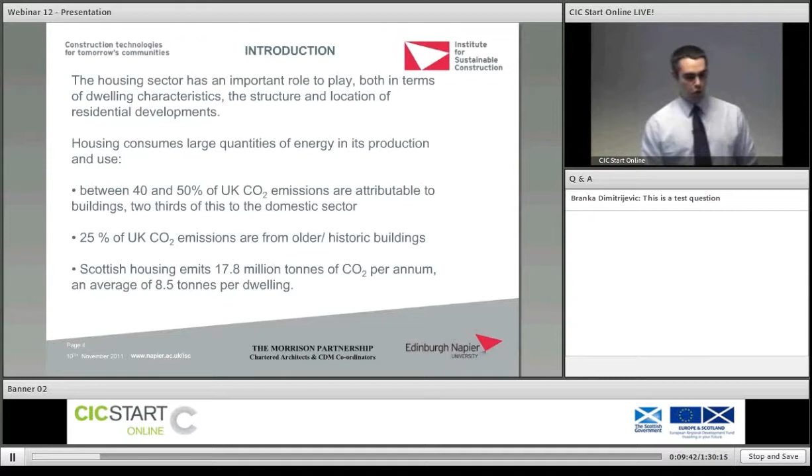The Scottish housing stock emits up to just below 18 million tonnes of CO2 per annum, and that comes about to 8.5 tonnes per dwelling. So there are a lot of issues on buildings contributing a great deal to carbon and the amount that's emitted.

For this reason, dwellings, existing and current stock buildings, historic buildings, have to be dealt with and refurbished. And it's not only because of its heritage or historic significance, but also because of its social significance in terms of communities and the location and value it presents to society. But it's also important to save energy.

Thermal comfort is important for the residents of these buildings. So it's something that has to be also addressed and is important.

The consultancy provided was an academic consultancy between Edinburgh Napier University and the Morrison Partnership. And there were a lot of issues with the building that we had to address.

The main objectives of the study were to reduce energy, to increase thermal comfort within the property, and also to create ways of using renewable energy or more sustainable energy production into historic buildings, in this case study.

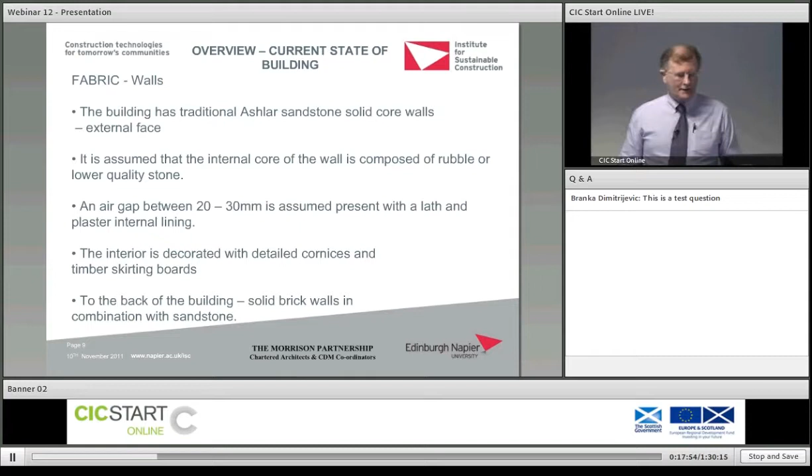I'm going to take you now through the different elements of the fabric. And first of all, we'll look at the walls. The main part of the building is simply a sandstone construction, as you would expect from the early 1800s. It's got a typical cross-section with infill rubble and a lath and plaster internal lining.

There are quite a few decorative cornices in the building, a number of very fine skirting boards and other window features. The existing timber shutters are all still in place. So there's quite a lot of features inside the building that we have to respect and retain.

However, the building at the back, which saw most of the extensions and alterations over the decades, was in fact built with brick and provides, unfortunately, a fairly cold area to that part of the house. That is perhaps one of the main reasons that the client was looking to have alterations, refurbishment and extension work carried out.

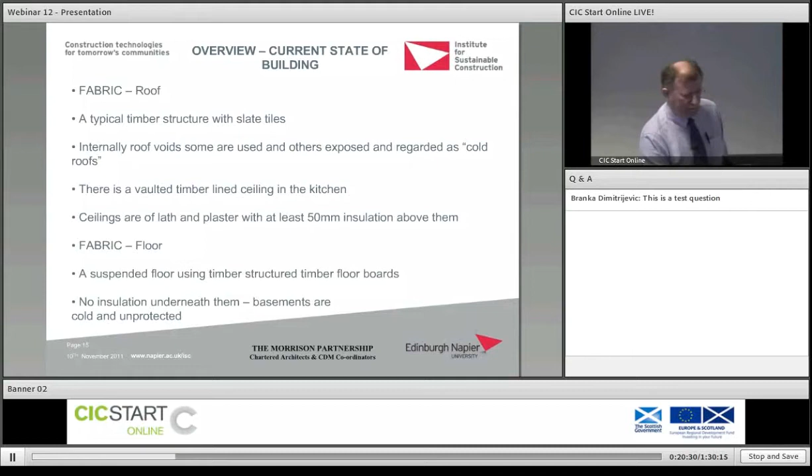The roof itself is fairly straightforward. It is just simply a timber construction with slates. There are some flat roofs in the new extension pieces to the rear of the building, but by and large, most of it is covered in slate.

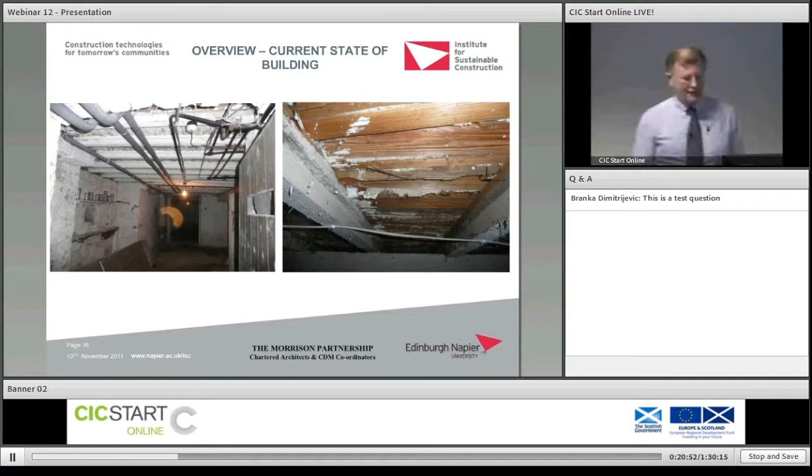The floor is a timber suspended floor with obviously finished floorboards for the look of the property. There is a small element of concrete floor along at the far end of the building where the hospital areas were. That is, of course, maybe to be expected. There is no insulation in the floor, but there is a modicum of insulation in the roof space.

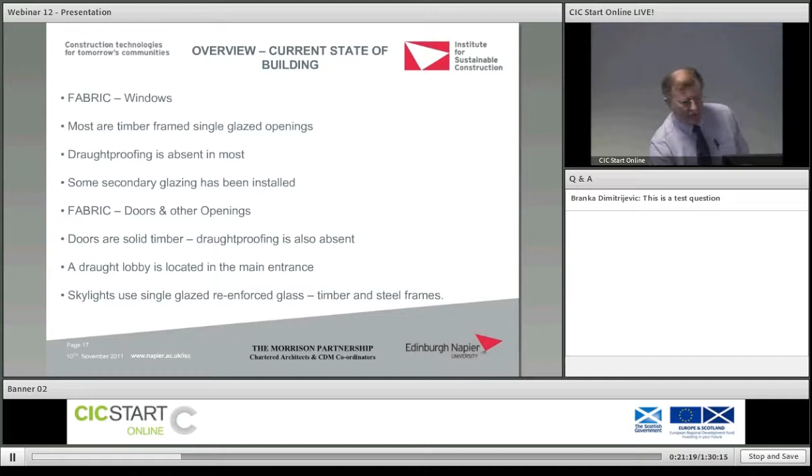Here you see typically the floors exposed. Fortunately, we are able to get pretty good access through the underbuilding to most of the ground floor areas, and that will provide us the opportunity to do some upgrading in that area.

The windows, most of them are single glazed. They're quite drafty. I think there needs to be quite a bit of draft proofing done to reduce the amount of unintended ventilation in the building. Similarly, the doors as well are quite ill-fitting.

The roof lights and skylights again provide quite a problem in terms of the amount of energy that's escaping from this building.

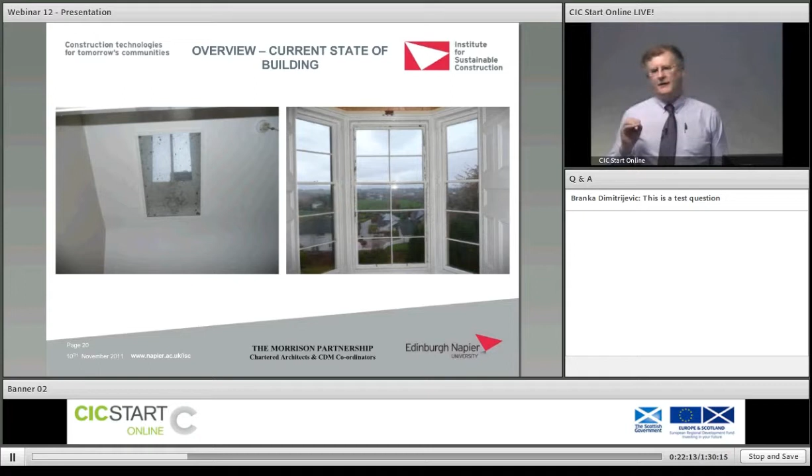Here you see a typical view of the single glazed window with shutters still operational, and we would recommend making sure that the shutters can come back into use as part of energy saving measures.

And these are some of the views from the upper floor, looking out towards the south from the master bedroom.

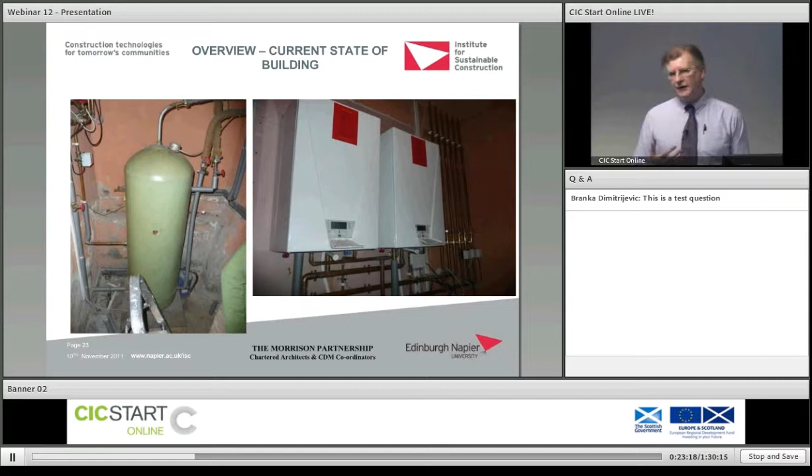The current heating system consists of two gas combi boilers, which have been fairly unreliable of late. One of the aspects they're looking at was in fact to renew the heating system, and we took that into account in our proposals. In fact, one of the boilers has been giving some trouble recently.

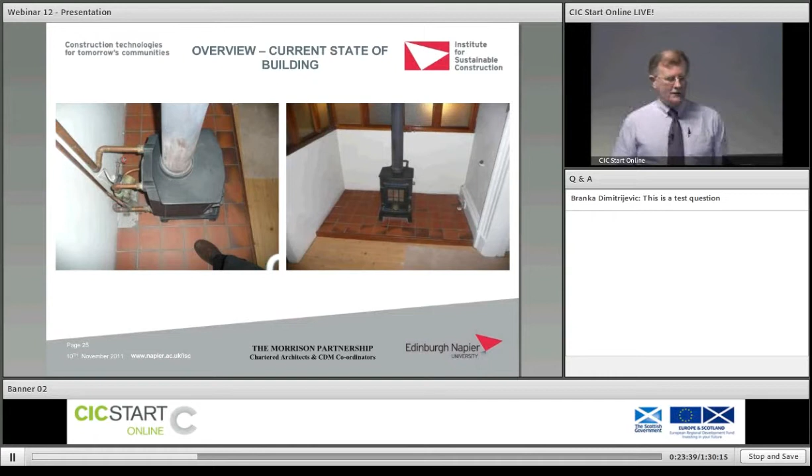The only other heating they have in the house is typically through the old log fires and also a couple of wood burning stoves located in the house. Finally, there is a small fan heater. These heating elements are seen here, the two combi boilers in the boiler room.

It's fairly large and will allow us quite a bit of space to consider some other type of boiler system which may be more sustainable. Here showing some of the wood burning stoves, and there is one, funnily enough, on the upper floor which is at the moment heating just the corridor space, which, as you'll see in some of the pictures later, the corridors and common spaces in the building are just as large as the rooms.

Again, a typical log fire.

Now let me just explain the client needs. Effectively, the client wishes the house now to operate as a warm and cosy dwelling house with their own business premises attached to it. It's nothing terribly complicated, but in doing that, we're obviously going to be creating different zoning requirements because of occupancy during the day and at weekends. So there's going to be quite a bit of sophisticated control that we need to put into any new heating system.

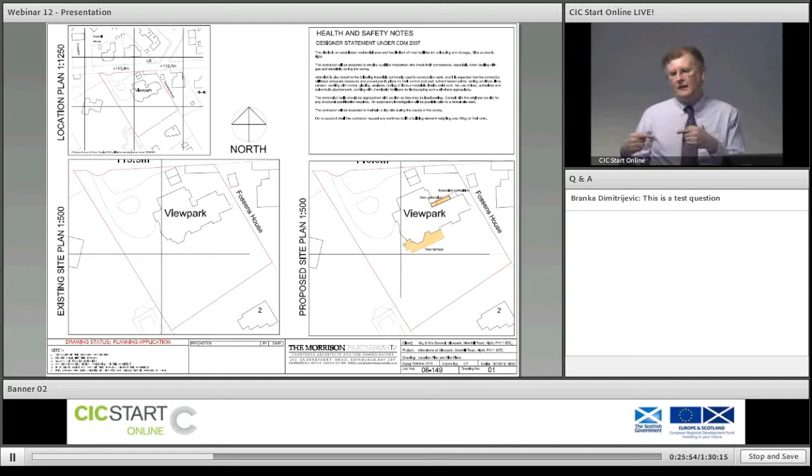The house itself has been altered at different times by different occupiers, as I said earlier, and so part of what we want to do in looking at improving this house for them is to try and peel back these development layers which have appeared over the years, until we get to a point where we have some understanding of a fairly typical wall construction. This will then allow us to design and build the new extension needed at the back of the building and upgrade and refurbish the fabrics, both for the floor, the ceiling and the walls, wherever we can, away from the existing or original solid wall external walls.

The client's main aim really was to try and achieve some kind of carbon neutrality, and that's obviously what we're trying to head towards within the constraints that we have, both from cost and the physical constraints of the building.

I'm going to now just briefly show an indication about the current status of the drawings. These represent simply the location and site plan of the building and the proposed site plan.

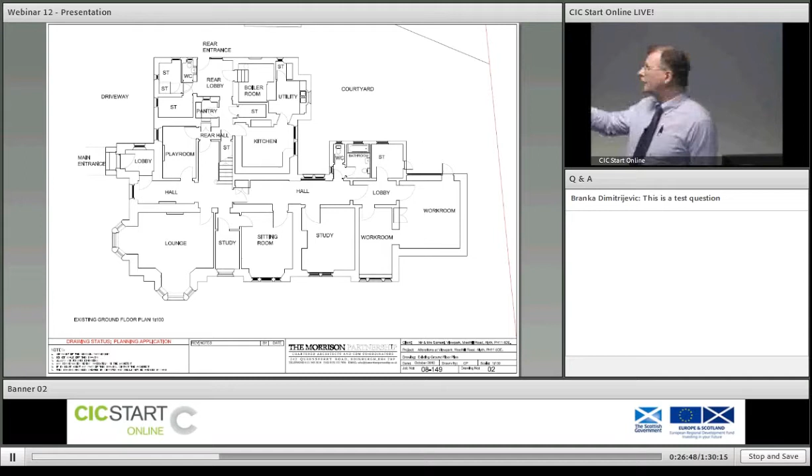Here is the ground floor plan. We can just take a moment to explain that, from the slide shown on the wall here, the existing part of the house, the early part, was defined by this area here. There is some uncertainty about this section—this may have been an 1800s extension—but by and large, where you see the thicker walls, this is the original part of the building.

This area at the top here was, again, a further addition to the building. I'm not sure of the date of that. And then this area to the northeast quadrant on the ground floor is the existing workroom for the client, but was in fact part of the main operating area for the old hospital, and these were some of the ancillary spaces for the hospital.

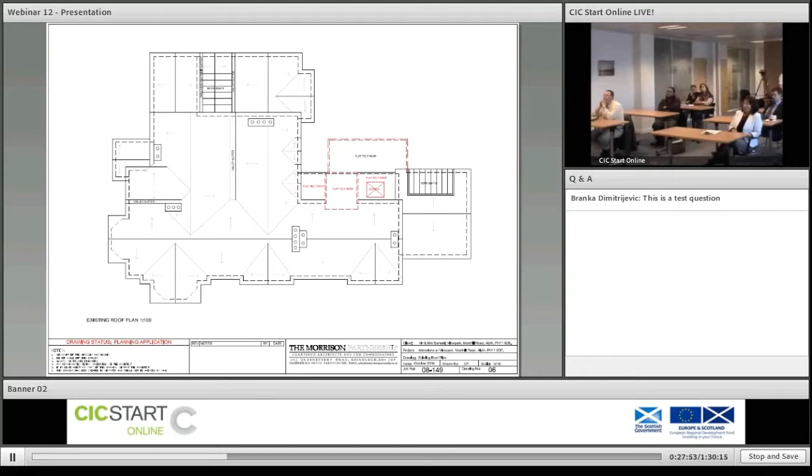And moving to the elevation, the roof plan first of all.

The bulk of it is in dual pitch slate arrangement. In this case here, there is a valley gutter, and the only area of felt flat roof is this area to the northeast. This room, of course, being slated as well.

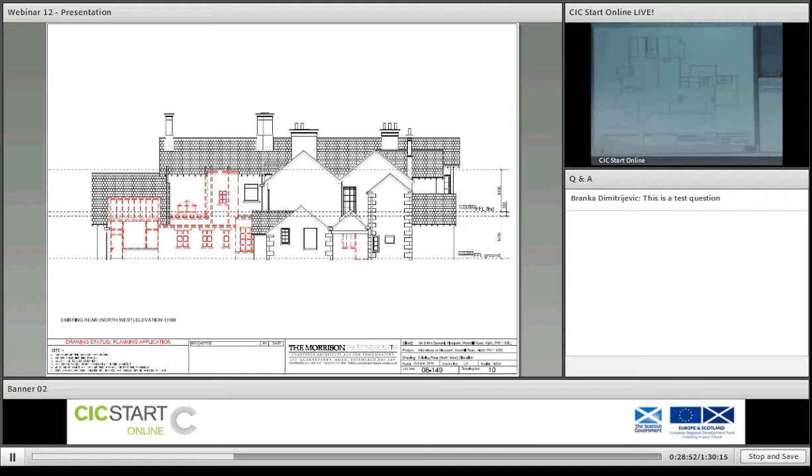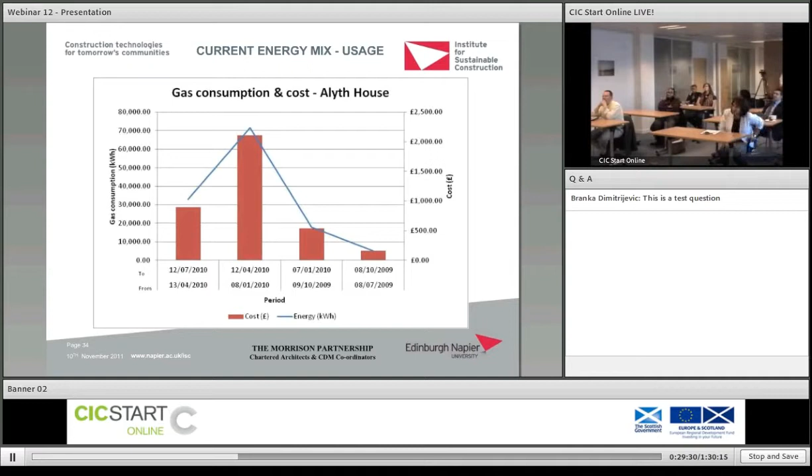I'll continue a bit more on the study itself. One of the first actions that we followed after a series of meetings with Cameron and other team members was really tracking down the energy use of the building, the current energy use, both the gas consumption and the electrical consumption.

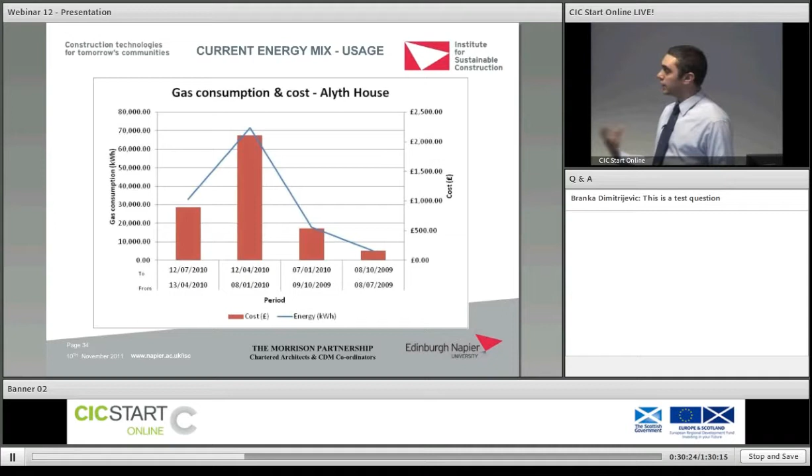So it was very important for us to measure or track down from the energy bills the consumption itself. So we analysed between 2009 and 2010, between the summer of both, and tried to indicate when gas was used the most. It can be divided into different periods of the year.

The winter period is obviously the most consumption and the most costly set of bills, with costs arising up to nearly £2,000 over a 3-4 month period, and consumption staggeringly up to 70,000 kilowatt hours. Again, the sheer volume of the building, with energy and space heating being used constantly, resulted in these extreme uses of gas.

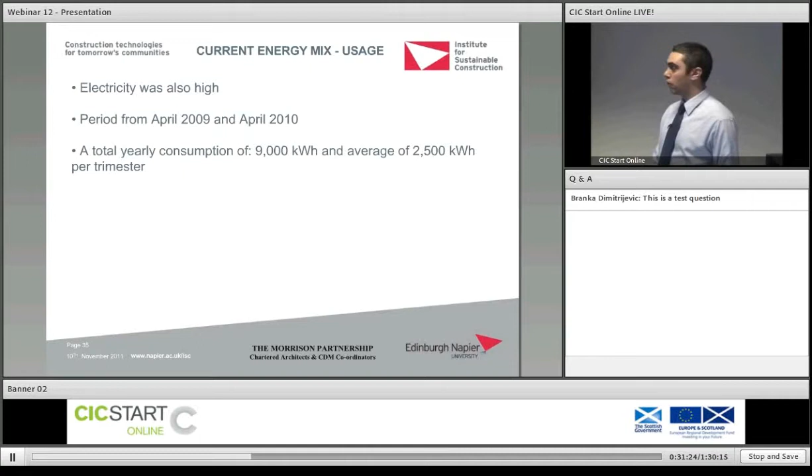In terms of electricity, most of it was used for appliances and some form of heating, with some electrical fan heaters in the kitchen, etc. So that wasn't as much.

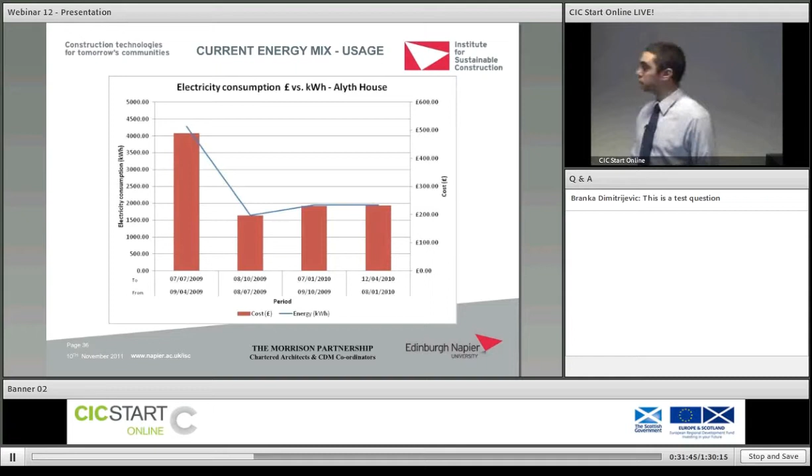Nevertheless, we did analyse it as well for synergy to obtain some renewable energy, etc. So we had to know what the current consumption was, and we looked at it in the same way, from spring to spring, 2009 to 2010, with a yearly consumption of 9,000 kilowatt hours, and an average of 2,500 per trimester. So again, not as much as gas, but nevertheless quite a lot in some periods.

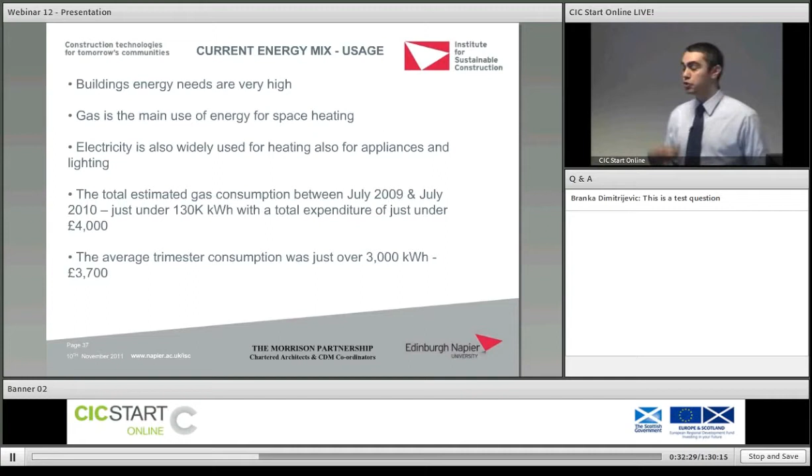This was important for us because we were later going to be using those figures to conduct our simulation, which is part of the study.

So just summarising again the gas use - I want to draw attention to the last information, which should be 30,000 kilowatt hours in that first kind of period. Again, quite a lot of energy, quite a lot in the heating bill, quite important there.

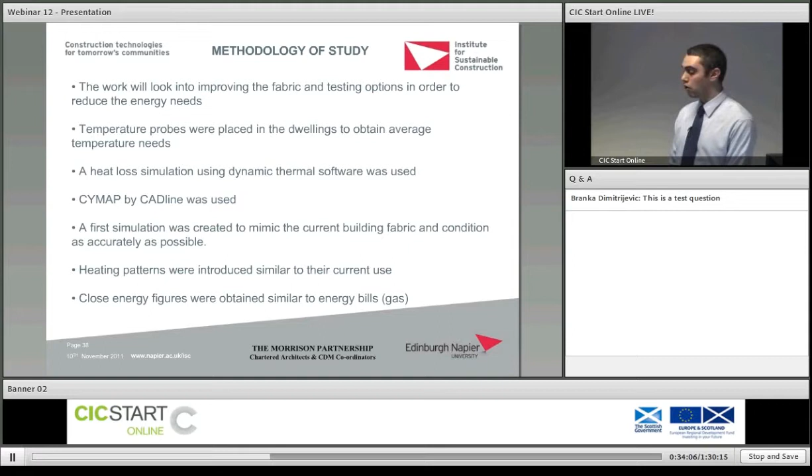So we used all this information to map out our simulation. Just to explain the methodology, we looked at different options of improving the fabric, creating a simulation or test of the current situation of the building. We used a software called CYMAP, developed by CADline, which is a two-dimensional study of the building, inputting current building materials, fabric materials, also adding energy patterns and the amount of energy consumed in a given period.

The approach was to try and mimic as best as possible the current situation with the aid of the heating bills, and also the different temperature probes which we set in the building to record the given temperature being used at the moment. That was the methodology approach - all that information was added to the software, and we could obtain similar patterns of use and energy consumption.

Once that simulation was in place, we could start giving alternatives to fabric intervention. The software gives you the ability to change or add to the current fabric. So as Cameron was explaining, the different wall materials and layering could be added to with insulation, etc., or different elements. We had an interesting dialogue with the architects regarding specification and insulation type.

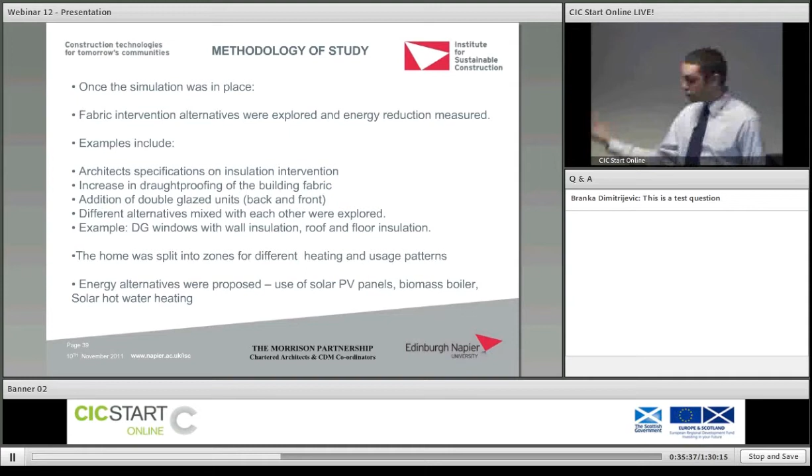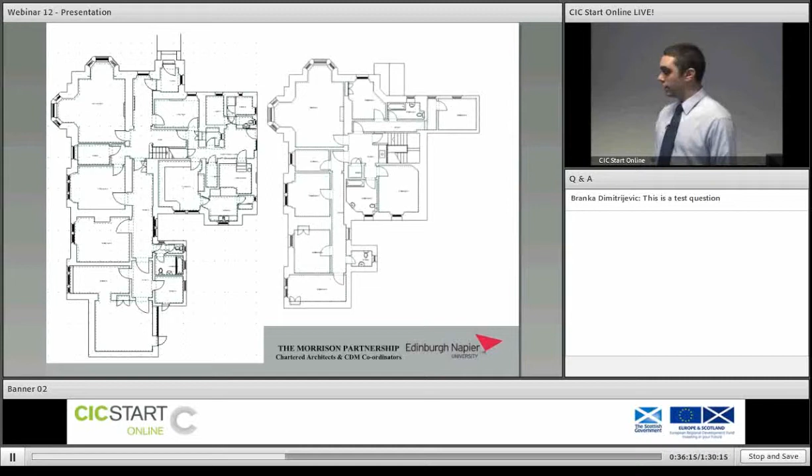Budget was also quite important, looking at elements of draughtproofing in windows and the building fabric itself, maybe the addition of double glazed units or secondary glazing as well. We played around with different alternatives. The study gave us a limit to those changes, which I'll explain later on, but it gives quite an interesting option to have alterations in material use, etc.

So the software requires the building plans being drawn or imported into it, and then assigning these materials to all the walls, and also assigning the floor, the roof type, partitions, and the windows and all the openings. So really, you're mapping out the current situation of the building.

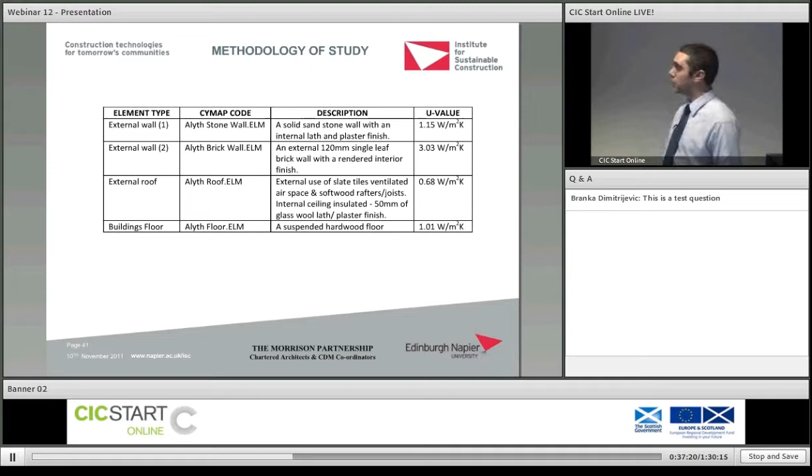To begin with, the current situation of the fabric, the software gives you some indication of the U value of these different elements. We can see the stone wall, the sandstone, giving a U value of 1.15 watts per meter squared Kelvin. The external wall, the back brick wall that was explained, quite more than the solid sandstone, at 3 watts per meter squared Kelvin. The roof at 0.6 - the roof had quite a big void from the ceiling to the actual roof, so that lowered that U value, and the floor in the same way. Suspended floor had just over 1 watt per square meter. So that was the current situation obtained from the software.

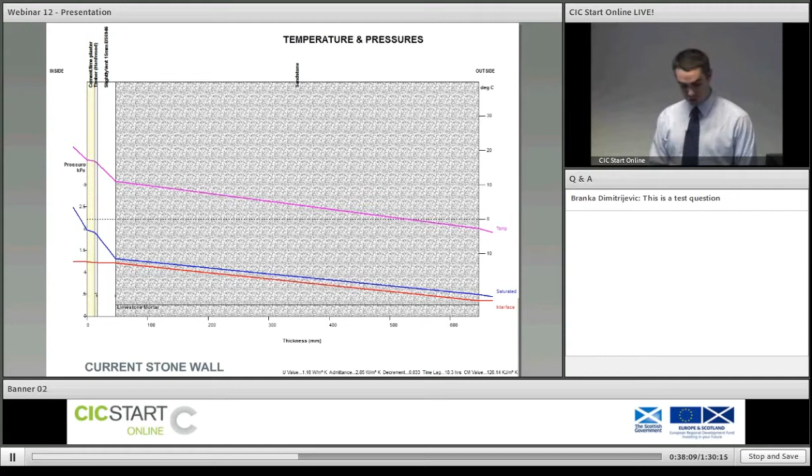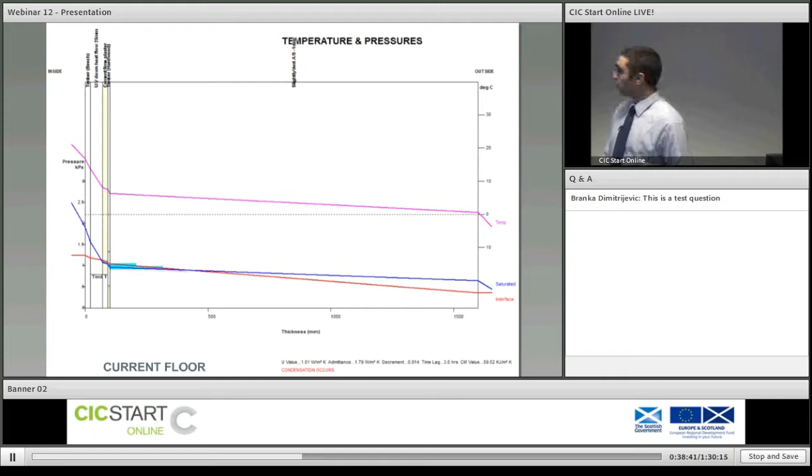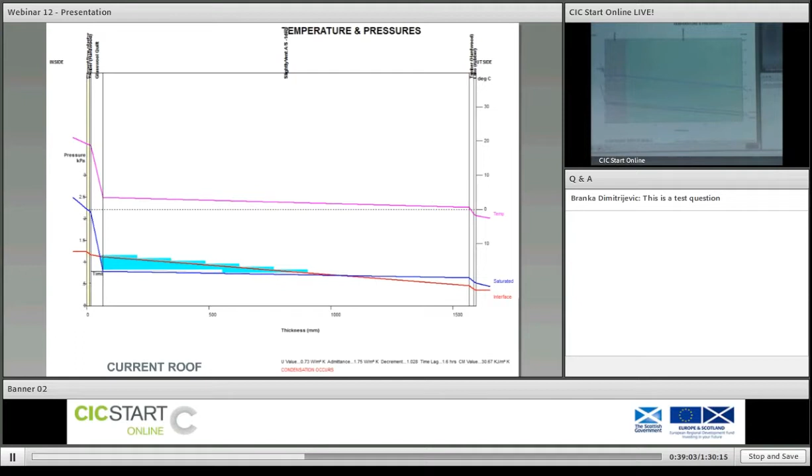So once we had that in place, as I was saying, there was an opportunity to start suggesting alternatives. We didn't have time to explore it in great detail, but we did look at key aspects and key solutions that could be an option in line with budget, in line with the client requirements and the architect's perception as well. So we started with the walls, which cover a great deal of the area of the footprint. It's quite a large building, it's quite a big volume.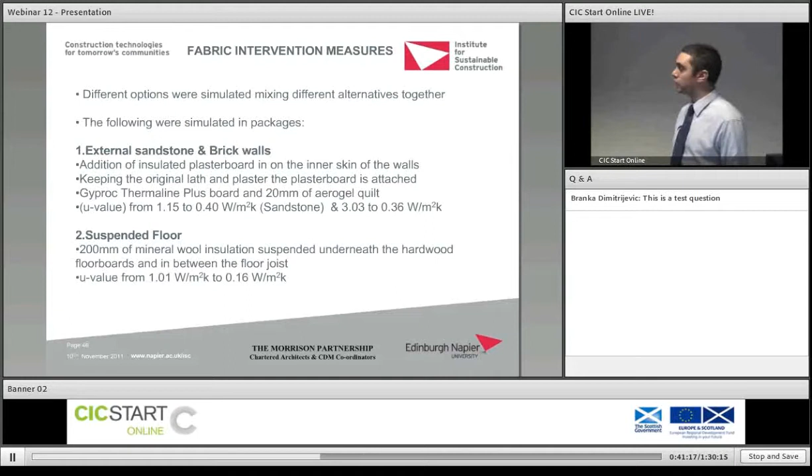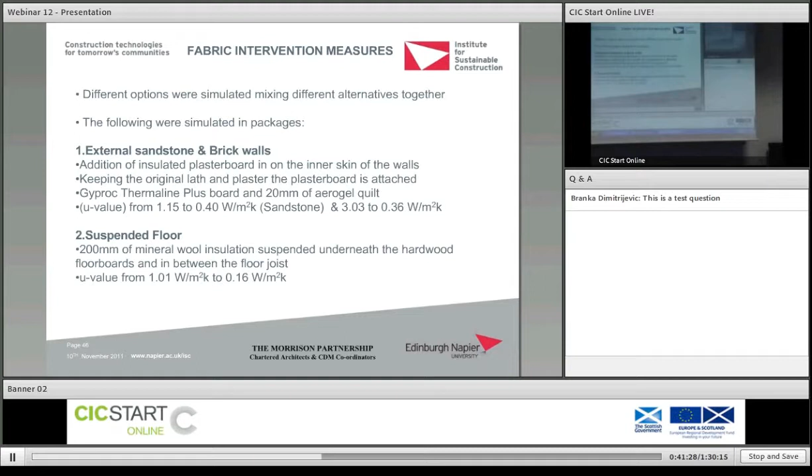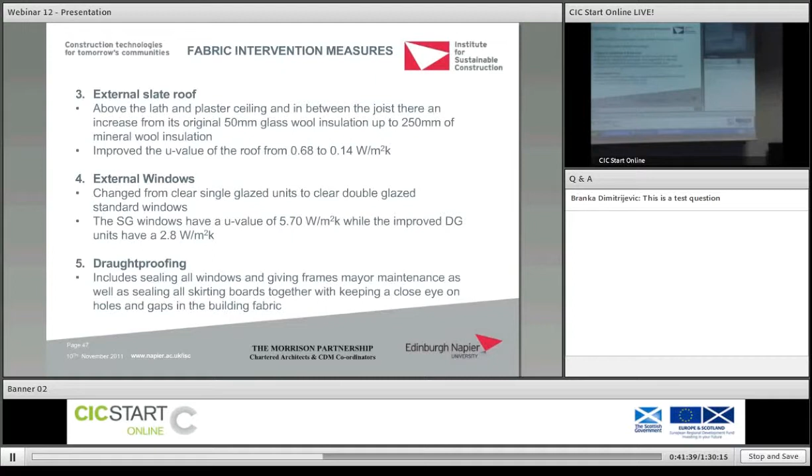In terms of the sandstone walls and the brick walls, we looked at adding some kind of insulation onto the lath and plaster. We looked at different options, and we modelled one in particular looking at Gyproc Thermaline Plus board, followed by 20mm of aerogel quilt, fixed to the original lath and plaster. The advantage of aerogel quilt is that it responds adequately to moisture and breathability within the original fabric. So that gave us some new U values - the sandstone from 1.15 to 0.4 watts per meter square Kelvin, and the brick at the back from 3 watts per meter square Kelvin to 0.36. Some substantial improvements on that side. Again, we could have explored other options, but this one was preferred.

In terms of the floor, in the same way, we opted for adding mineral wool underneath the joists with some kind of netting, suspended and fixed onto the joists and the hardwood. And again, a U value improvement from 1 down to 0.16 watts per meter squared Kelvin.

All these improvements can be modelled in this software. In terms of the roof, in the same way, originally it had 50 millimeters of glass wool from some previous upgrade or improvement, and that was increased with 250 millimeters of mineral wool just above the ceiling, giving an improvement from 0.68 to 0.14 watts per meter squared Kelvin.

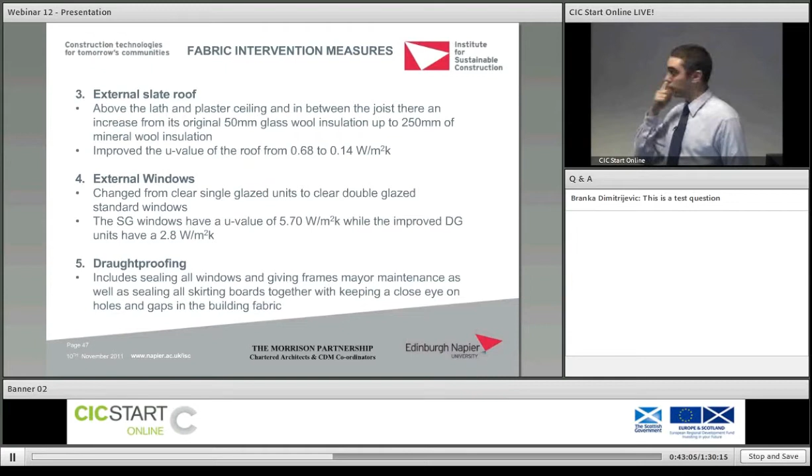The windows - we could have expanded into maybe triple glazed, etc., but we opted more for double glazed, timber framed, or the option of secondary glazing as well. In terms of the software, double glazing is best modelled, and from a standard 5.7 U value, the double glazing was giving us a 2.8 U value. Again, better improvements are available, but this was the one selected. In terms of draft proofing, it's difficult to indicate to the software where you're going to be sealing and realizing this draft proofing. The way it understands draft proofing is by decreasing the air changes per hour within the building, so that can be modified in the software to simulate draft proofing.

We then, with those solutions, try to apply them to different areas and alternatives within the building elements. One option explored was dealing with just the north facade of the building as a first approach, by adding insulation on the floors, the roof, above the ceiling and the top roof, and installing double glazed windows just on the north facades.

We then followed on to adding insulation to all the elements in terms of the walls, the floor and the ceilings, with no window upgrading. Many times, because of the sheer number of windows and openings, adding double glazing timber framed windows can be quite a big cost, so that was explored as just adding insulation and leaving the windows to one side.

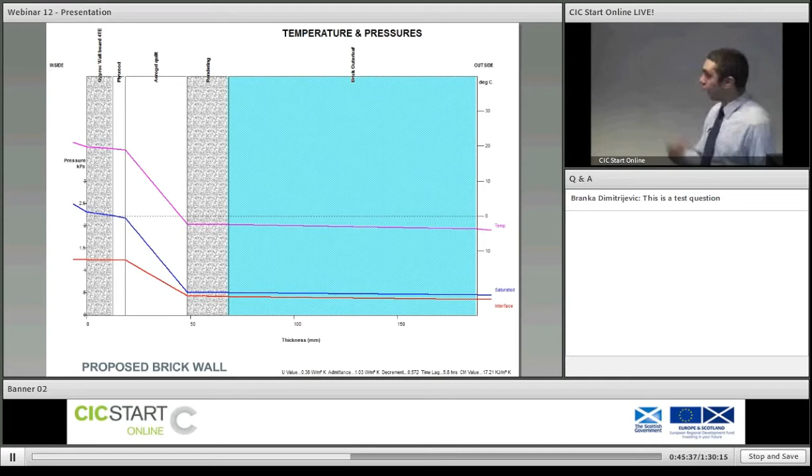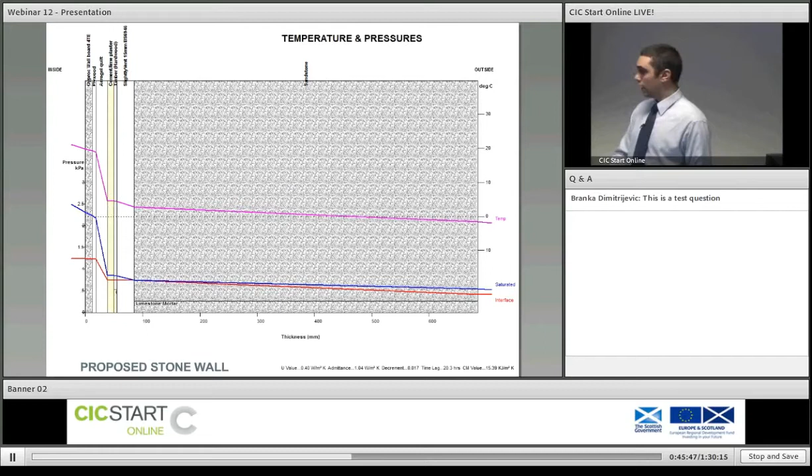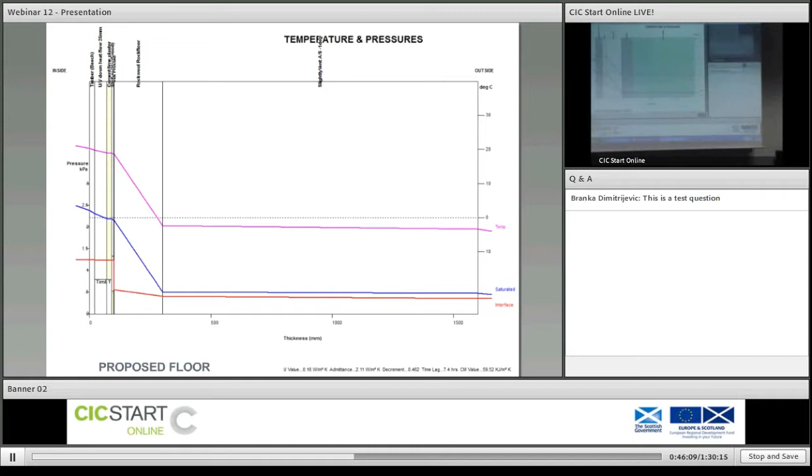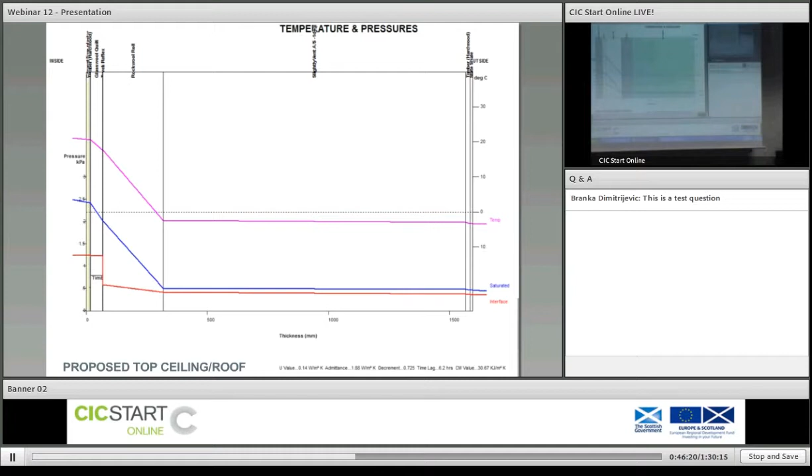So again, this was modelled. These layers were added to the walls, and both the temperature differential between inside and out, and the moisture elements within the walls, were explored. This is a brick wall: we've got the original brick wall, the render, the aerogel quilt, and the board on that. An added plywood board was put just after the aerogel quilt to give it a bit more rigidity for any fixings onto it.

In the same way, for the sandstone wall, keeping the original lath and plaster, we tried to integrate these layers of aerogel and Gyproc board, trying to keep that aspect of humidity within the component. In the same way for the floor, with added insulation between the joists, and also above the ceiling, trying to improve that up to current standards, above 270 millimeters.

In terms of renewable energy, it wasn't explored in a great deal of depth. We were more focused on the intervention in the fabric, but nevertheless we did try to have the synergy, as the title says, between energy and fabric. We explored a number of options and did a small feasibility study of each, trying to integrate them onto the building and its current needs.

The advantage of the simulation and software we used is that with all the changes, we would obtain the amount of energy needed to keep comfortable temperatures indoors. So it would tell us how much energy we would save with each intervention. Our calculations were done with the maximum intervention on the fabric, so maximum savings in terms of energy, covering both electricity and heating, space heating.

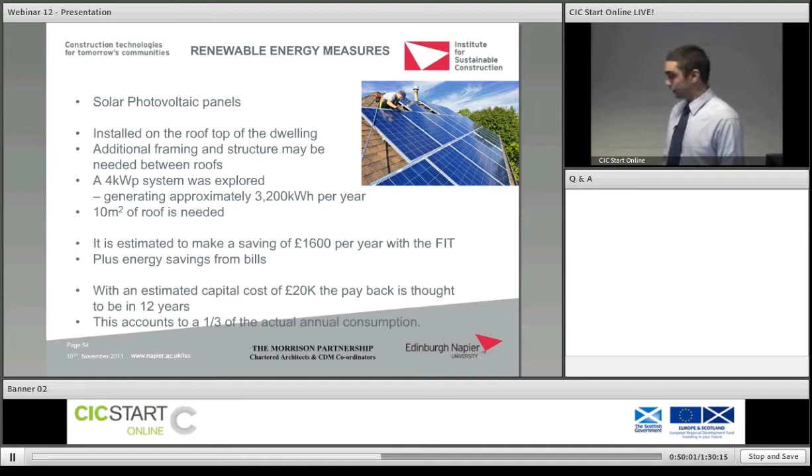So we did a small feasibility study. We opted for a small 4 kilowatt peak system, which came out to roughly 10 meters squared of roof space needed. That study showed around just above 3,000 kilowatt hours being produced by those panels, giving a saving using the old feed-in tariffs of £1,600 per year, complemented by savings on energy bills. With the feed-in tariff and capital cost in our calculations, a payback of roughly 12 years was expected, and in terms of total yearly electrical use, this accounted for a third of the yearly electrical consumption.

In the same way, we looked at wind generators, concentrating on a 2.5 kilowatt peak system with an 11 meter mast. That would approximately generate just over 3,000 kilowatt hours per year, with a capital cost around £15,000 - though these costs are estimated and could fluctuate. Incorporating it into the feed-in tariff, we expected to receive roughly £1,100 per year, and with the energy savings we calculated a payback of around 10 years, accounting for another third of the electrical energy used in-house.

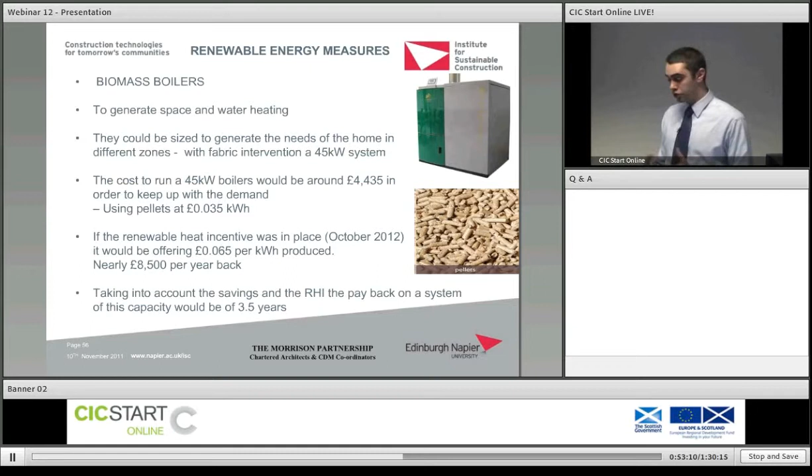So we looked at biomass and having one of these biomass boilers. Wood pellets were explored, and with the simulation, we estimated that with all the fabric intervention, we would need a system of 45 kilowatts, which is quite large - but that's because of the sheer size of the building. That biomass boiler would cost around £4,000 per year to maintain, including the cost of pellets, which is a lot, but again, it's space heating we're talking about.

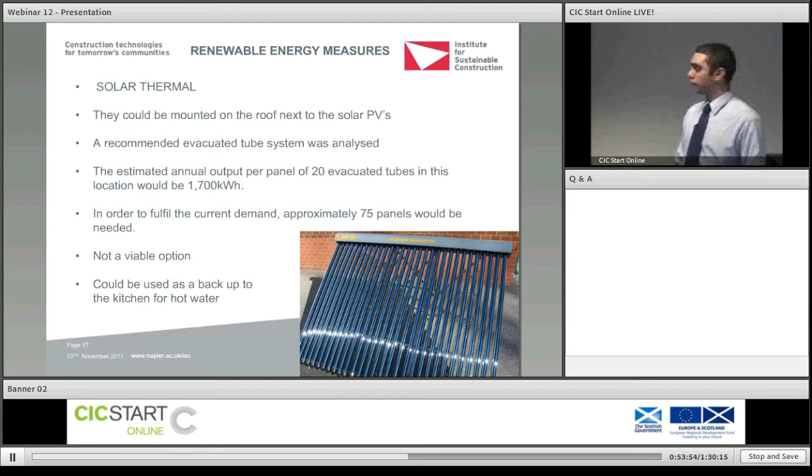So with the projection, similar to the electricity, we projected implementing the renewable heat incentive, which is hopefully being introduced next year, October 2012, offering 6 pence per kilowatt hour produced by this biomass boiler, with an expected payback per year of 8,500. So again, these are small feasibility studies just to show the client the different options.

In the same way, we looked at solar thermal, evaluated with the use of evacuated tubes, and we thought it was not efficient enough to fulfill a lot of the gas and space heating needed - it would require a lot of roof space and a lot of panels to fulfill the full capacity. So we've really opted for solar thermal maybe for particular areas, for example the kitchen, for hot water, by having 1 or 2 panels.

So with the fabric intervention and the renewable energy, all that information, along with the paper written, was presented to the architects. There were some plans and solutions being developed, where some of the options were integrated. But this is just an indication of some of the proposed interventions.

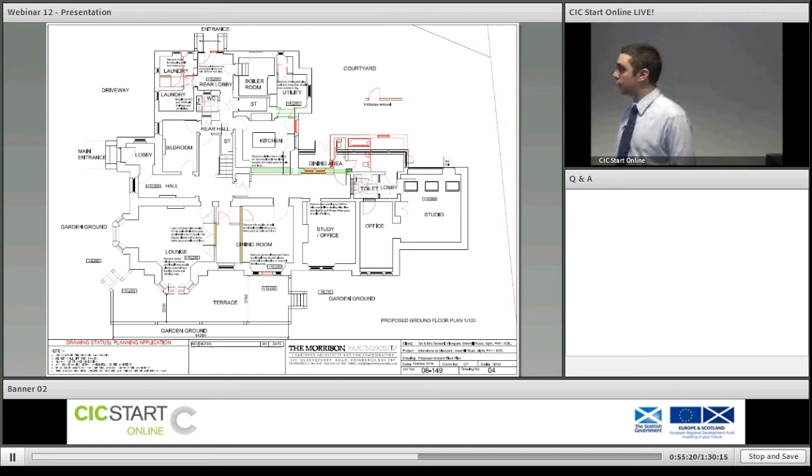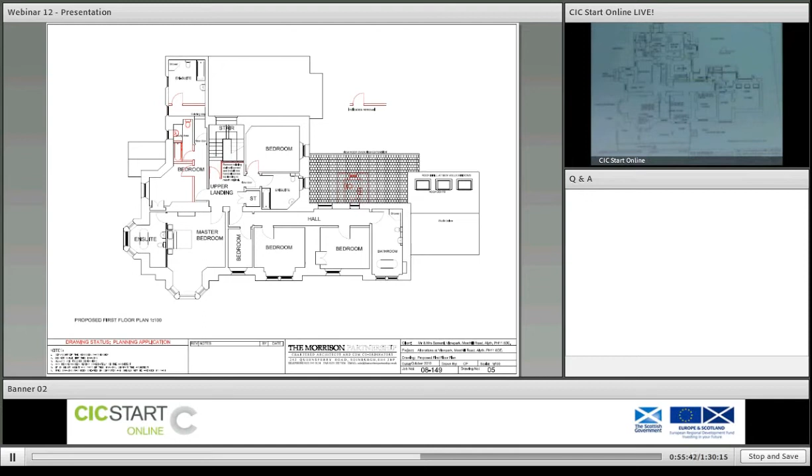Cameron explained on the back elevation how a series of demolitions of the brick areas were going to be conducted, with spaces being opened up for various uses, dining and kitchen areas. But really, the architects working with the fabric and the current building were trying to produce an interesting approach to this refurbishment.

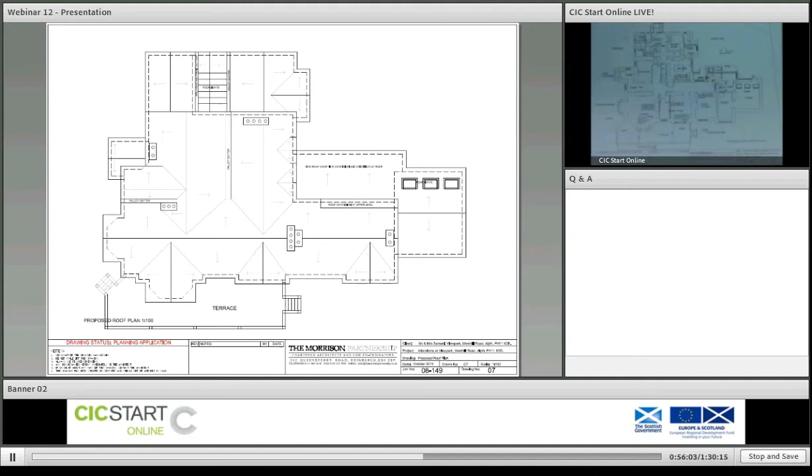Again, opening up this front area to a terrace that feeds into the dining room and lounges. On the first floor, little intervention, but again some partitions being developed and changed, opening up and taking away the clutter. It seems to be a building that's had a lot of intervention, a lot of owners, and a lot of different partitions used, so the architects have been quite thorough on that.

This is the roof view and roof plan, with the terrace there and little change. Some expansion at the back with areas for the kitchen and dining room, etc. The front elevation has not had much done other than opening up to this terrace. At the back is where you've got this small extension, integrating our options and alternatives in terms of the little remaining brickwork at the top and the first floor, and then the sandstone dealing with those walls as well.

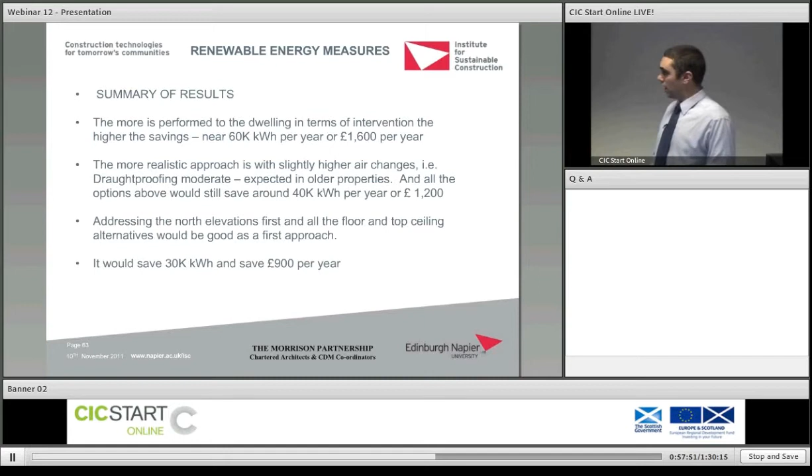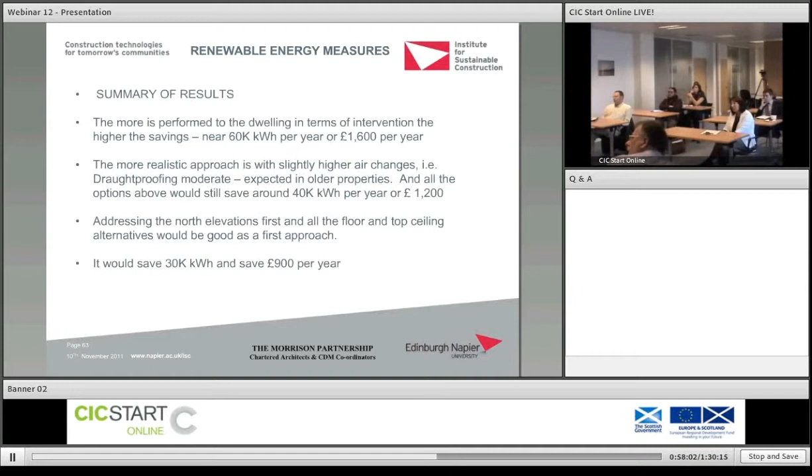So looking at a bit of the summary and the results obtained - quite a lot, and I've got a table following this looking at the intervention. With the full intervention, option 8, which was the one I was talking about, we had a saving of about 60,000 kilowatt hours per year, which came up to a saving of roughly 1,600. The good thing about this simulation is that it not only gives you savings in energy, but also savings in costs, which is good to refer back to.

So with the different alternatives, by looking at alternating the draft proofing, there were also considerable savings, although maybe not doing the full refurbishment - still quite a lot of savings in terms of energy and cost. There was also the approach of dealing with the north elevations, which was, I think, a good first step to the fabric, and then maybe in a later stage dealing with other elements.

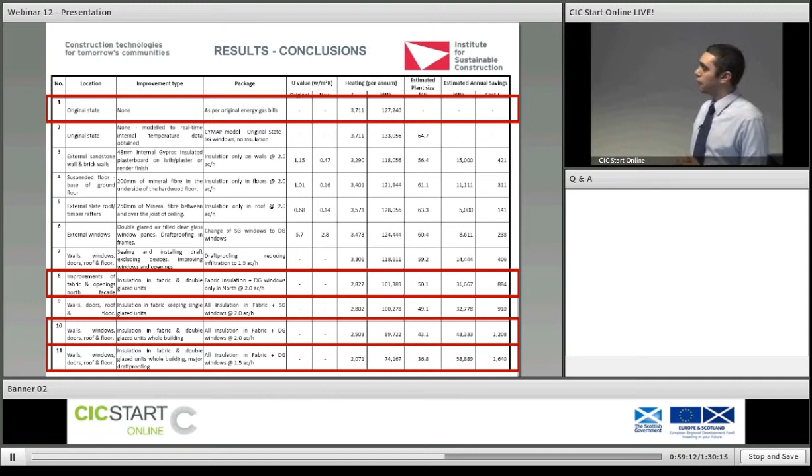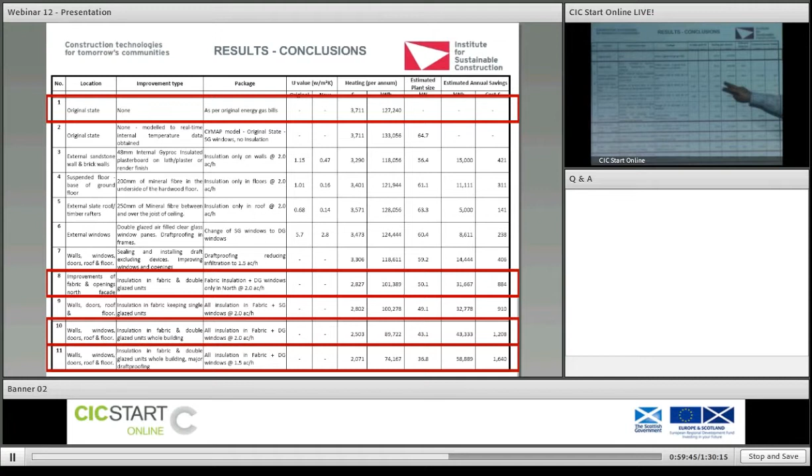So this is the summary of the fabric intervention, which maps out all the different alternatives and options we looked at. First, mapping out the current situation with the energy bills and their costs, then trying to simulate that and obtain similar current figures with the model. As you can see, they're quite similar in that current situation. Then with the different alternatives, there were savings in terms of cost and energy, and as you can see, that figure goes down the most with the full intervention.

These two elements, these two options, where you've got considerable savings with both in terms of cost and energy. And that also maps out the plant size for space heating. We can see it going from a current quite high, above 60 kilowatt system, down to one just below or around 40 kilowatt system. We also looked at annual savings as the intervention was done, and also the cost per year on energy.

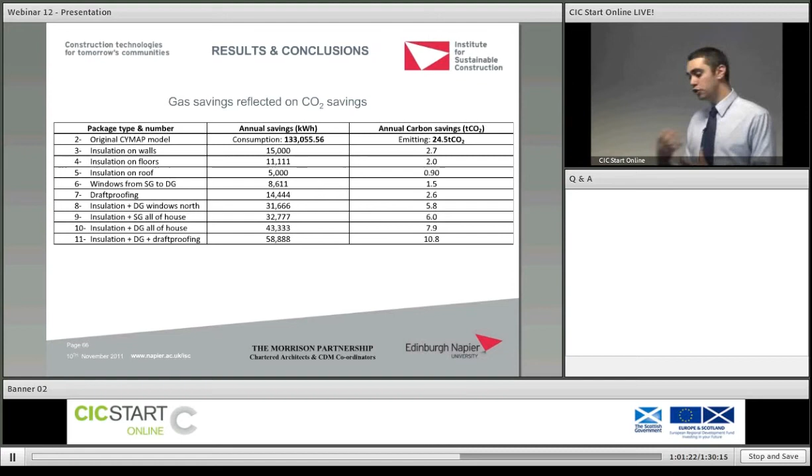In terms of the conclusions, obviously our prime focus between our consultancy and the architects was addressing the refurbishment in an appropriate way, and looking at materials in a big way, looking at the embodied energy of them, and looking at results, and trying to integrate these new materials with older fabric. I think that was quite important.

We're obviously looking at the aspect of an ecological approach and saving carbon, and also looking at budget and how viable it is to conduct these changes. A lot of these historic buildings and current stock buildings have to be taken case by case, because most of them are different in their fabric and material use, and also the users are different in all cases.

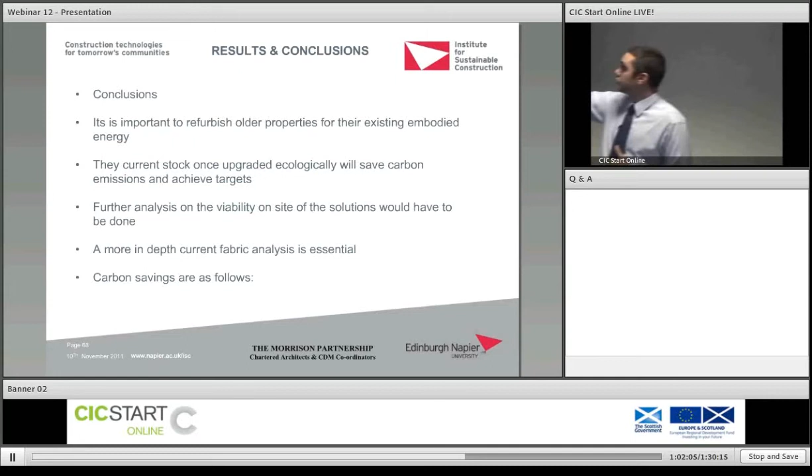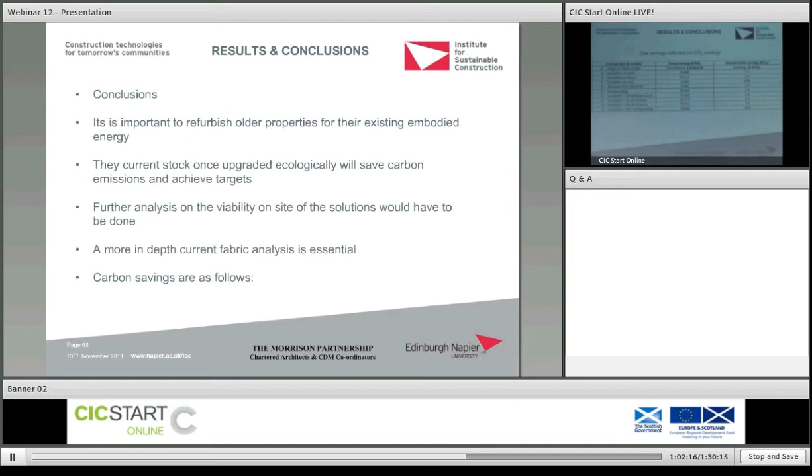So there were lots of carbon savings and cost savings. For example, for every intervention and every option, we mapped out the savings in terms of energy in kilowatt hours from the original, and looked at how much CO2 in tons was saved on each one.

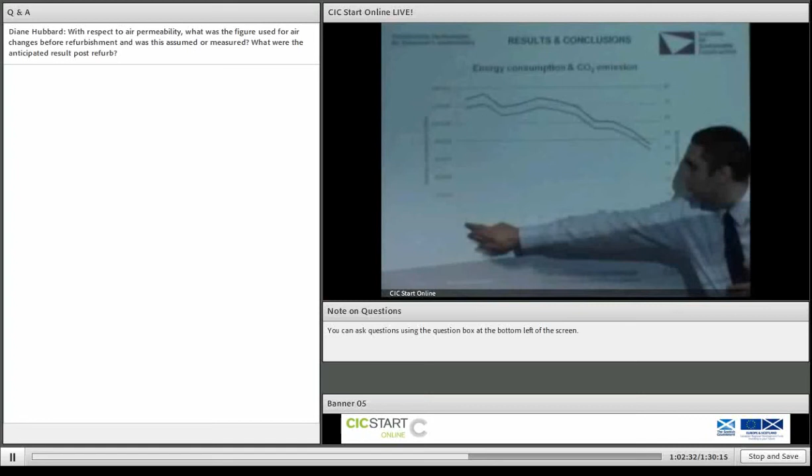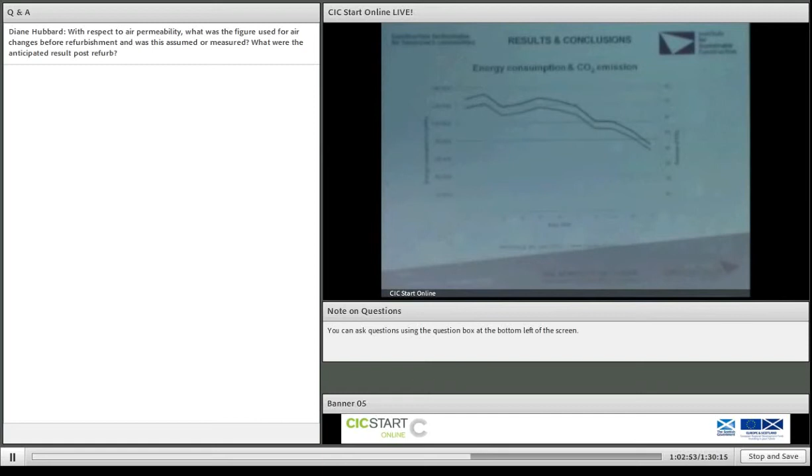And just looking again at all the alternatives, including the two current, with the energy bills and the simulation itself, how different options would give you different savings, and obviously the idea is to lower that as much as possible. With the last two, looking at the full intervention, indicating less CO2 and less energy being used.

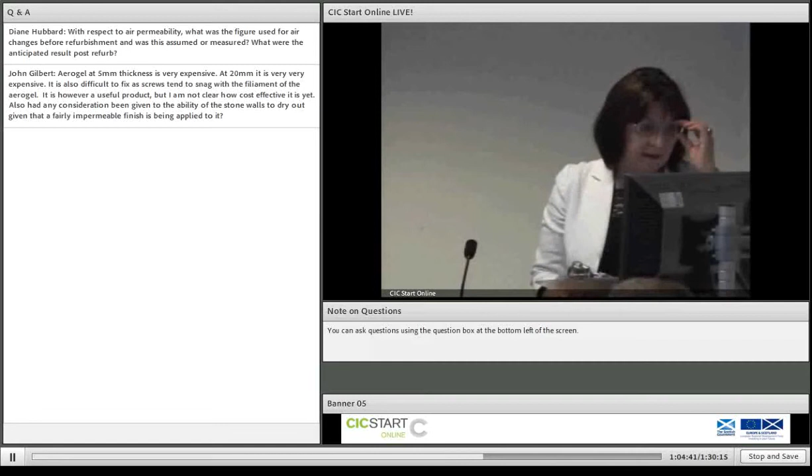Aerogel at 5 millimeters thickness is very expensive. At 20 millimeters, it is very, very expensive. It is also difficult to fix, as screws tend to snag with the filament of the aerogel. It is, however, a useful product, but I'm not clear how cost-effective it is yet. Also, had any consideration been given to the ability of the stone walls to dry out, given that a fairly impermeable finish is being applied to it?

Yes, aerogel is quite expensive. As far as I know, it comes in 10 millimeter layers, so 5 millimeters, I'm not sure that it exists. So yeah, it's quite an expensive material, but because of the savings in space, we're talking about very thin thermal solutions. I think it was a good alternative. In terms of the fixings, we proposed, apart from the Gyproc board, a plywood fixing behind that to enhance the fixing and make it a bit more stable.

Yeah, I would say to John, thank you for your comments, that's very helpful that those are shared. As we stand at the moment, it is unlikely that we will be doing anything to the existing lath and plaster wall; that is not at the moment on the agenda for the proposed tender issue. Partly to do with cost, but also to do with trying to target areas where we have least cost and least intervention for maximum energy return. Having looked at it with Julio, that is not an area we would necessarily be promoting with the client at this stage.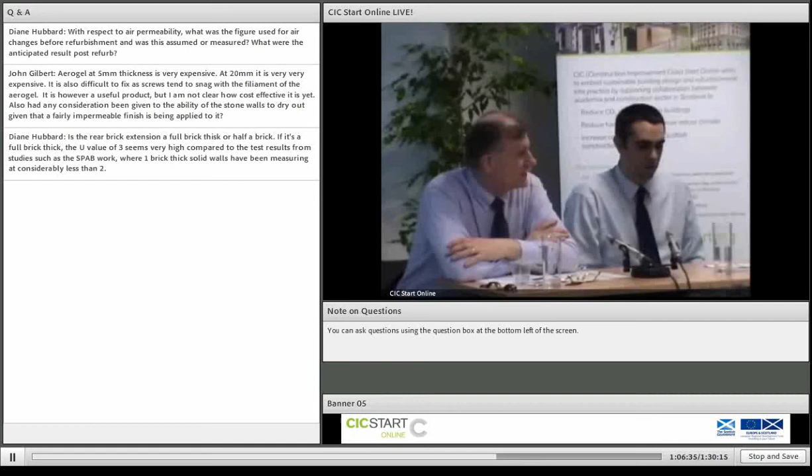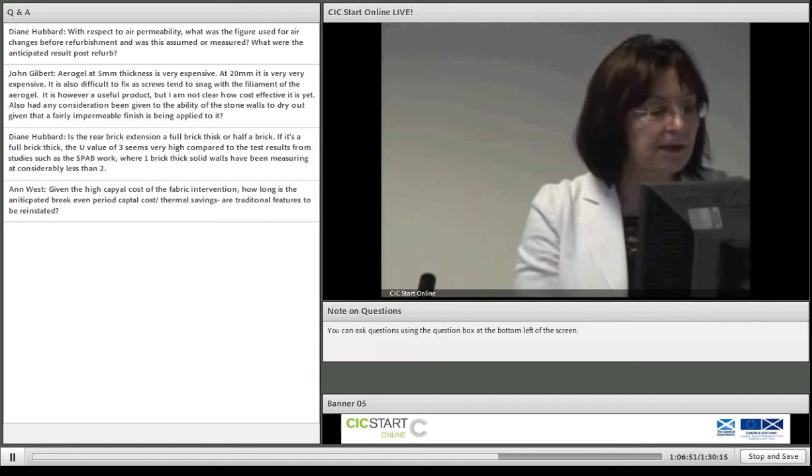Okay, here is another question from Diane Hubbard. Is the rear brick extension a full brick thick, or half a brick thick? If it is a full brick thick, the U value of 3 seems very high compared to test results from studies such as the SPAB work, where 1 brick thick solid walls have been measured at considerably less than 2.

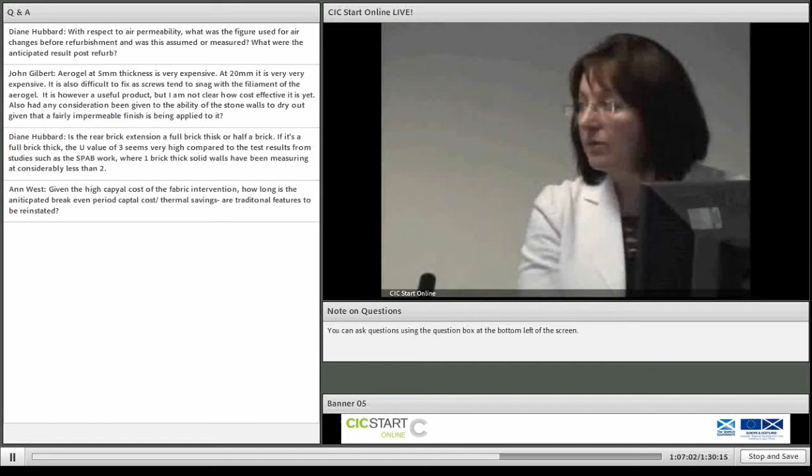It is a full brick, that's how it was simulated. The way we simulated it, a lot of the material specs were obtained from the software itself, so maybe there are some variations and some scope for addressing and rectifying that. But brick in particular was from the material choice in terms of the software.

Okay, let's see another one. From Ann West: given the high capital cost of the fabric intervention, how long is the anticipated break-even period for capital cost versus thermal savings? Are traditional features to be reinstated?

We didn't explore the return and payback from the fabric interventions, mainly because we didn't cost them. That wasn't part of the scope of the study, to obtain a capital cost, so we didn't approach it that way.

If I can add on this point, we are seeking to retain as many of the existing features as we possibly can. The shutters will be in where they're jammed and they will be freed, and we'll be doing all kinds of things to bring the older part of the property back into the way it functioned previously. In contrast, where we're able to do demolition and other refurbishment work, these will be the areas where we'll be targeting better specification in terms of wall and roof insulation and so forth.

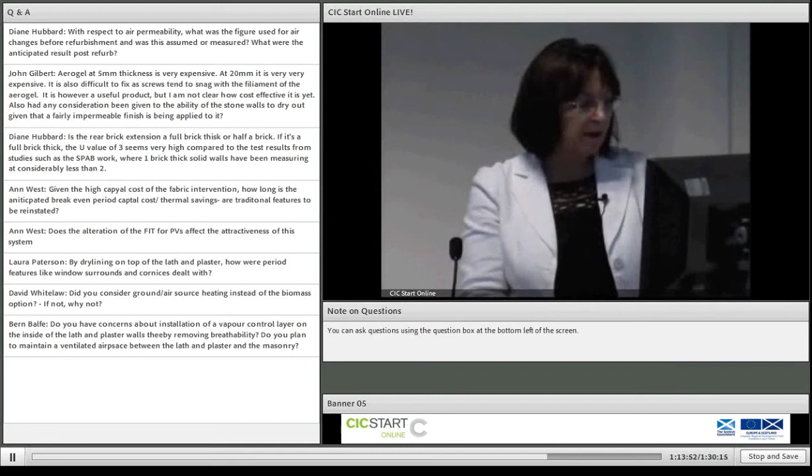Next question is from Bern Balfe. Do you have concerns about installation of vapor control layer on the inside of the lath and plaster walls, thereby removing breathability? Do you plan to maintain a ventilated airspace between the lath and plaster and the masonry?

We've been told, and we deal a lot with manufacturers on aerogel, and they've repeatedly said that a vapor control layer is not needed because of the nature of the aerogel itself and how hygrothermal it is. And the ventilated airspace, yes - that's something we consider because aerogel is known to be not a barrier for breathability as much as other products. We are kind of enhancing that through the skirting boards as well, and any other measures.

Okay, another question now from Ben Glennon. Did you use any particular computer software to assist in calculating the cost savings and carbon savings? Not for this work. We do usually use PV software for the sizing and the economic side. What we did use was an Excel spreadsheet with given values and a feed-in tariff, etc. A bit more simple than software.

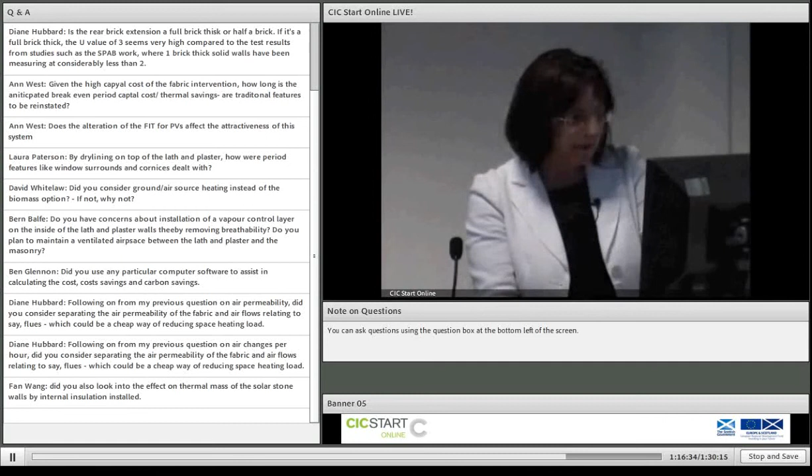We have also a question from Fan Wang. Did you also look into the effect on thermal mass of the solar stone walls by internal insulation installed? The simulation itself does take into account thermal mass, and with the different U-values of the different layers and the calculations of energy retention, etc., it does take it into consideration, but not separately. No, we didn't do it separately.

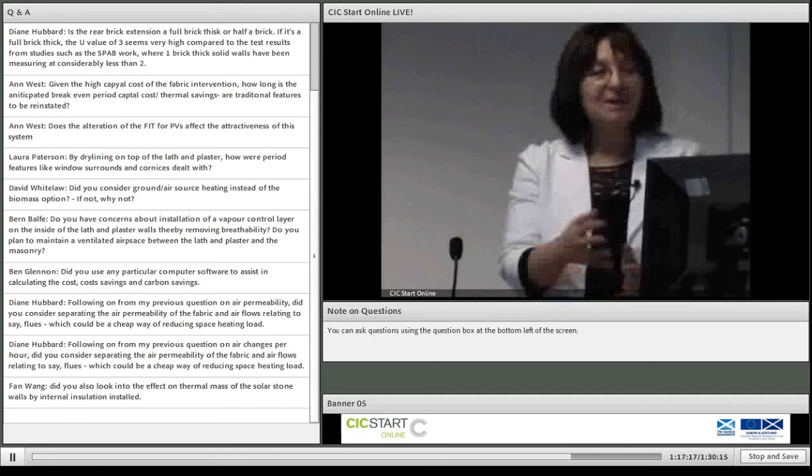Thank you. Richard Atkins. I wear various hats, but I chair the Royal Incorporation of Architects in Scotland's Sustainability Task Group, and about to start a PhD here at Glasgow Caledonian. Did you consider, as part of the heating ventilation strategy, looking at either whole house mechanical ventilation with heat recovery, either with or without any form of solar slate technology as a preheat?

Simple answer, no. Again, it's the scope of it - this is an academic consultancy. There was little time to explore all the solutions. Do you think that might be a strategy that could again help reduce the energy load in terms of minimizing heat up times for ventilation air? Yes, I think there's a question mark on how to implement it into older properties and how that would fit with ducts, etc. But I'm sure there's a solution, that's something that can be explored.

I don't know if you want to add anything. No, but I'm sure, thank you kindly for your comments, Richard. I'm sure that they are aspects which we will continue to review with the client. I should say that the project, even as we speak, we still have not applied for the building warrant. So there are many issues that, along with Julio and the client, we will still be exploring. As Julio says, it was an academic consultancy, somewhat limited, but nonetheless, we found it extremely helpful because what it did was it gave us very good grounds for trying to make some early strategic decisions about the energy and the fabric and how we could take the project forward.

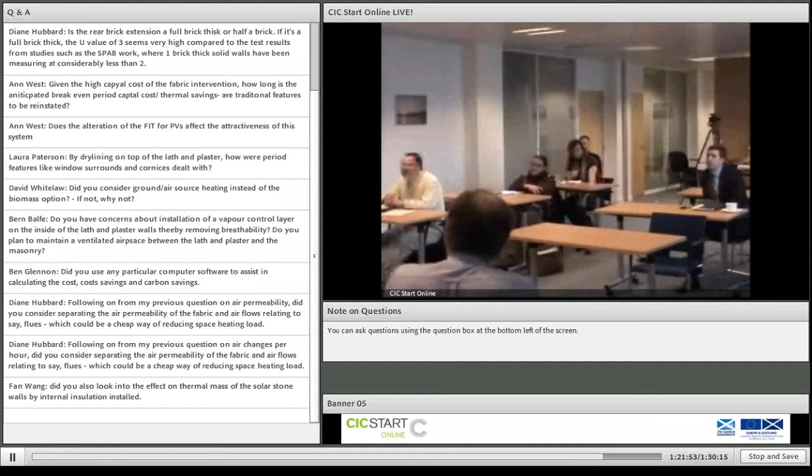You mentioned the layering and zoning of the building. When looking at the different options for improving energy efficiency, did you explore the building use patterns of the occupants, working with the clients as to how they could change the locations of some of the most used rooms to fit within those zones, for example the office?

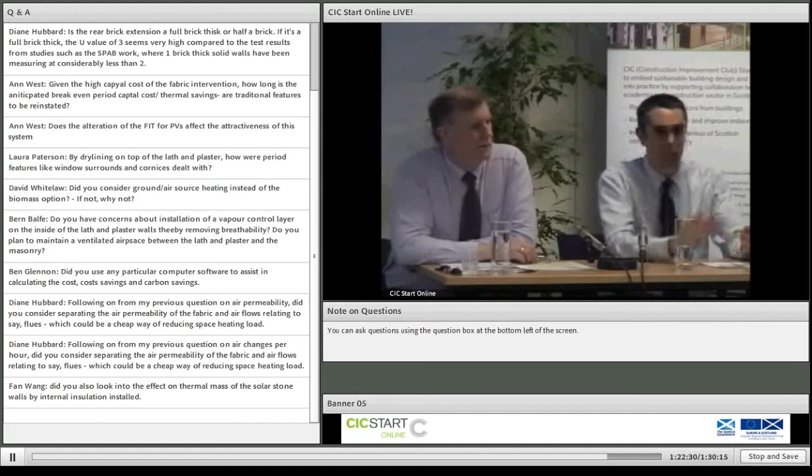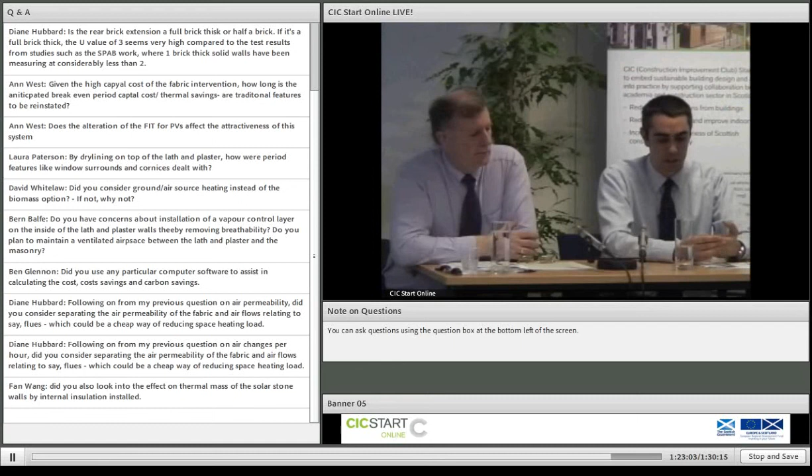And how they could then improve the energy efficiency partly through their occupation as well as through the other measures mentioned? Yes, definitely. Although there hasn't been that direct intervention from myself with the client, Cameron and the team at the Morrison Partnership are fully aware of the client's needs and pattern of living. Especially with the analysis of the heating side of things, we discussed the usability of the building and its future, and how the different areas were proposed with new alternatives in terms of space. The different zones we assigned in the software were in line with future expansion and use, looking at the living areas and dining areas as a core zone with the majority of the building's use, then bedrooms and office uses.

Can I just add to that - when we originally visited and spoke with the client, what we would call the eastern wing of the property, typically the old hospital areas, was by and large simply closed off. They were unheated areas in the property and were extremely cold because they simply couldn't manage those areas with the heating requirement, while trying to live within the existing original domestic dwelling house that was there.

Part of the briefing exercise at the beginning of our involvement was to find out how we could unlock those spaces to make them either a standalone business area for our client or whether they could be integrated with the property. So there were phases where it was treated as a standalone part of the building, although attached.

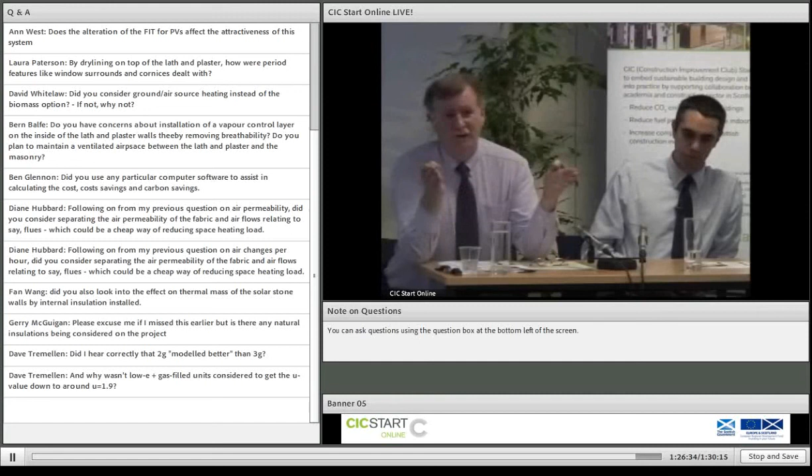So there is, I think, probably across the country, a need to re-educate people to understand that you can't actually live in these older properties in a modern lifestyle. You need to think about how, with those high ceilings and hard to heat rooms, you should be thinking about putting on an extra jersey, or if you purchase a property like that, accepting the consequences of ownership - that you have to dress in a suitable way. If you want to walk around in T-shirts, buy a better heated, more thermally efficient building. But you do raise a good point about social aspects to the use of properties, which has an impact on energy use.

Thank you. Just two quick questions. One from Gerry McGuigan - please excuse me if I missed this earlier, but was there any natural insulation considered on the project?

Not considered directly, but it was part of the options we explored. Personally, it would have been a much better approach, but it was impossible to test all types of insulation. Although it is important - we are considering sheep's wool or hemp fabric or fibre, something that would allow the building to continue to breathe in terms of our floor and ceiling insulation.

Two questions from Dave Tremellen. Did I hear correctly that 2G modeled better than 3G? And why wasn't a low-E plus gas filled unit considered, to get the U value down to around U 1.9?

Again, it was one of the options - the double glazed simple approach and glass coating. There's obviously lots of options out there with better performance, but this study was really looking at a couple of options that were discussed with the architects. The good thing about the simulation is that at any time we could add these different options and give more solutions to the architect. Although Julio was looking at options, that's not to say those options have been adopted. In many ways, looking at the options was as much to rule them out as anything else.